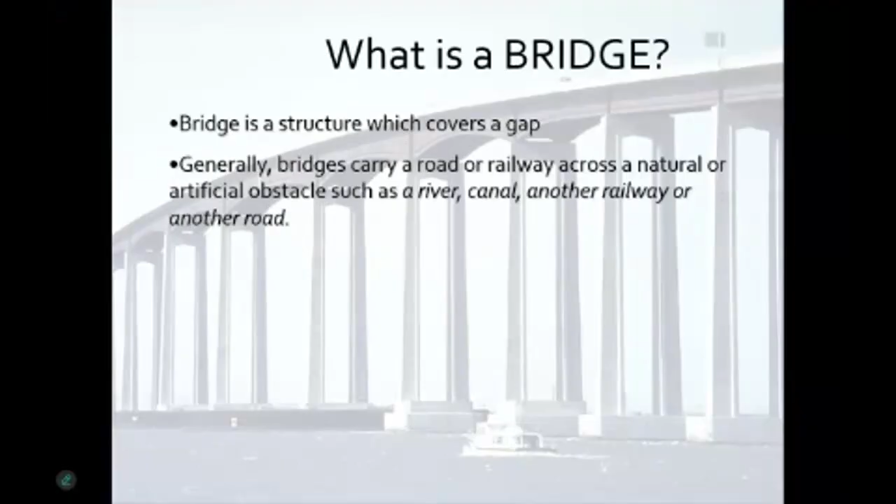So what is a bridge? Well, very simply, a bridge is a structure that covers a gap. Generally, bridges carry a road or a railway across a natural or an artificial obstacle like a river, a canal, another railway, or another road.

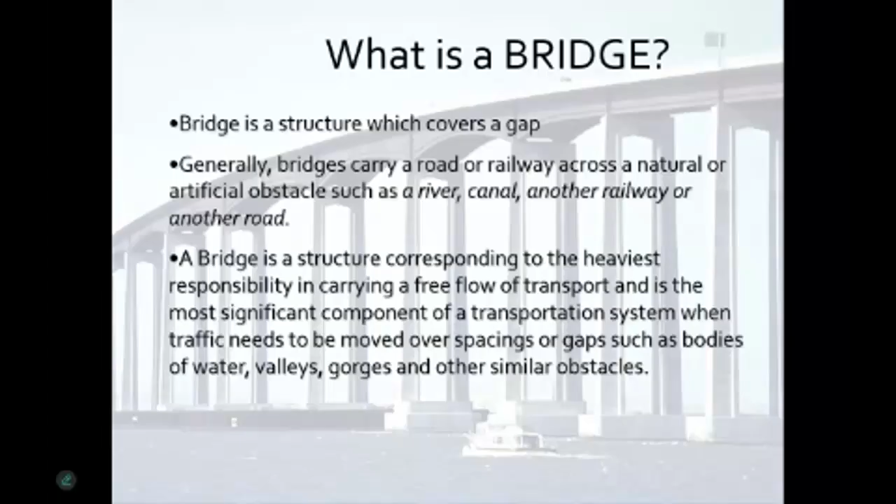The bridge is a structure corresponding to the heaviest responsibility in carrying a free flow of traffic, and is generally the most significant component of a transportation system when traffic needs to be moved over spacings or gaps, such as bodies of water, valleys, gorges, or other similar obstacles. A bridge is often the key element in a transportation system, as it controls the capacity of the system.

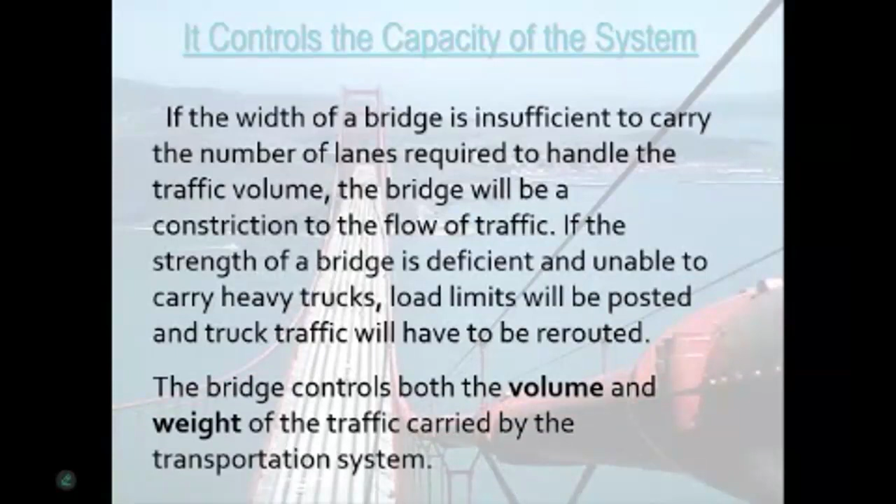If the width of a bridge is insufficient to carry the number of lanes required to handle the traffic volume, the bridge will become a constriction to the flow of traffic. If the strength of a bridge is deficient and unable to carry heavy truckloads, load limits will be posted and truck traffic will have to be rerouted. So the bridge controls both the volume and the weight of the traffic carried by the transportation system.

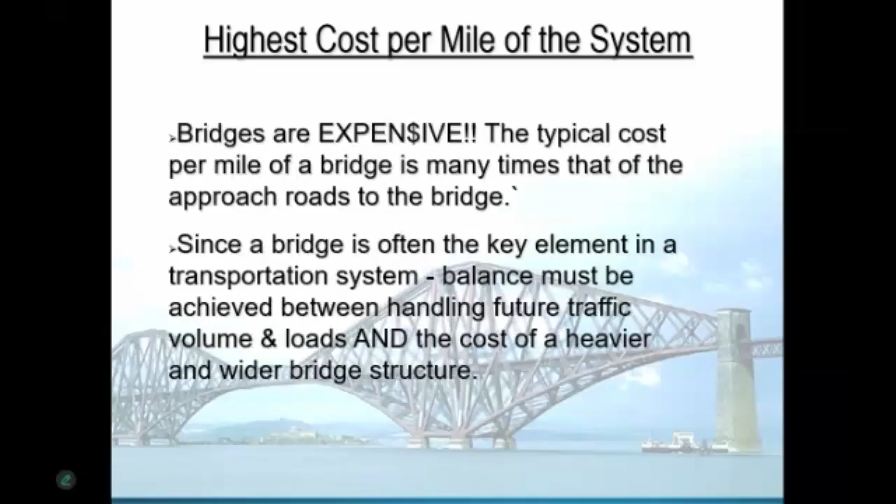Generally, it's the highest cost per mile of the transportation system. Bridges, very simply, are expensive. The typical cost per mile of a bridge is many times that of the approach roads to the bridge. And since a bridge is often the key element in a transportation system, balance has to be achieved between handling future traffic volume and loads and the cost of constructing a heavier or a wider bridge structure. If a bridge fails, the system fails.

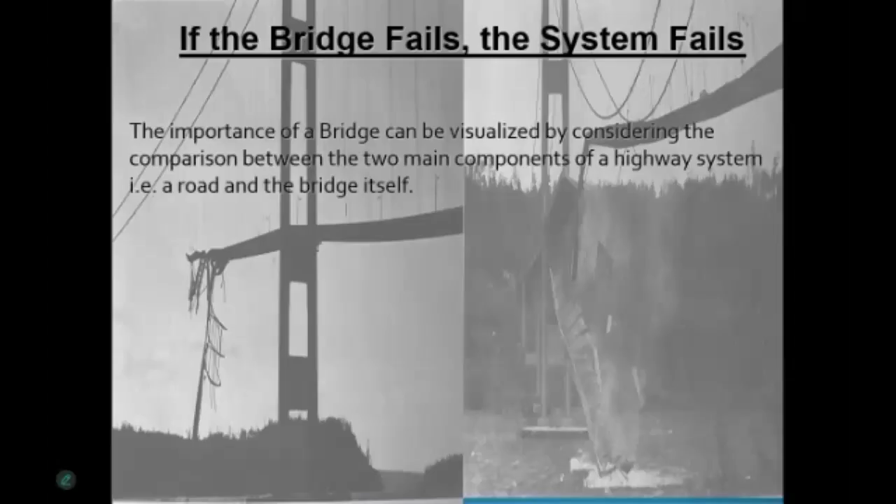The importance of a bridge can be visualized by considering the comparison between two main components of a highway system, i.e. a road and the bridge itself. For example, suppose in a road there occurs deterioration, ultimately a crack in the road, thus making a sort of an inconvenience for travelers on that roadway.

But it won't result in stopping the flow of traffic, as traffic can proceed or a bypass can be provided. Now, the traffic will no doubt continue to pass at a slower speed with some problems in the roadway, but in the case of a bridge failure, its flow is completely stopped. And that is the reason it's often said that if a bridge fails, the system fails, as the function of the structure could no longer be served at all.

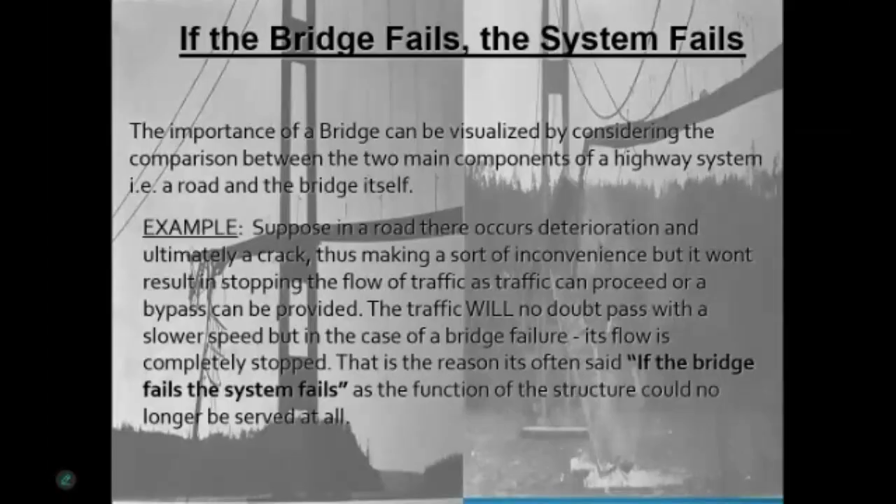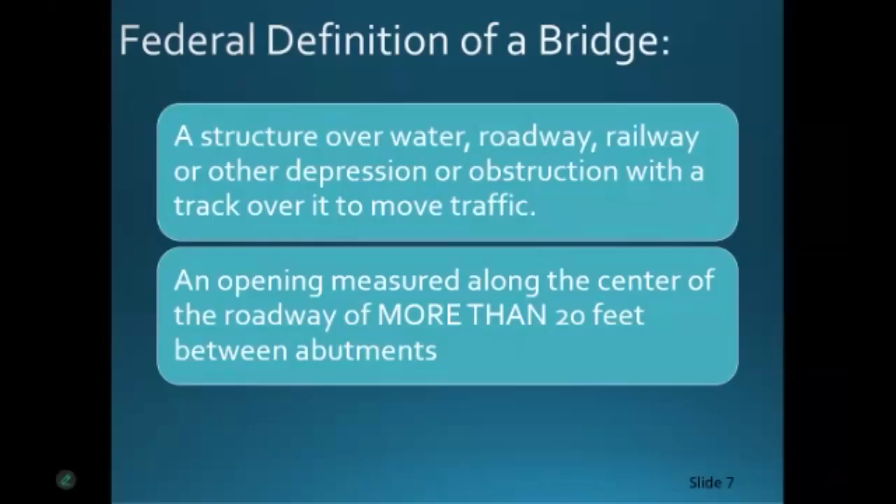Now, Federal Highway's definition of a bridge: a structure over water, roadway, railway, or other depression or obstruction with a track over it to move traffic. It's an opening measured along the center of the roadway of more than 20 feet between abutments. So, there are a variety of different types of situations this might occur. 20 feet is not very long, so it doesn't take much of a stretch to qualify as a bridge.

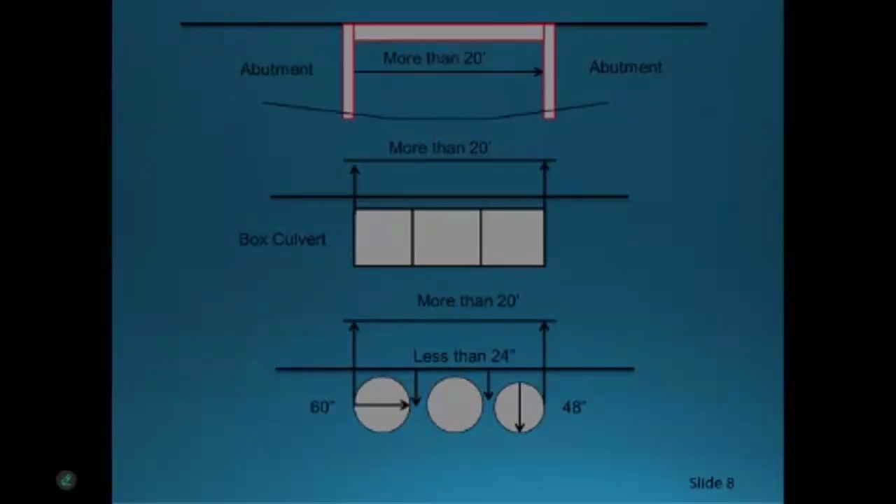Type of bridge materials, just about anything you imagine: timber, reinforced and prestressed concrete, steel, masonry.

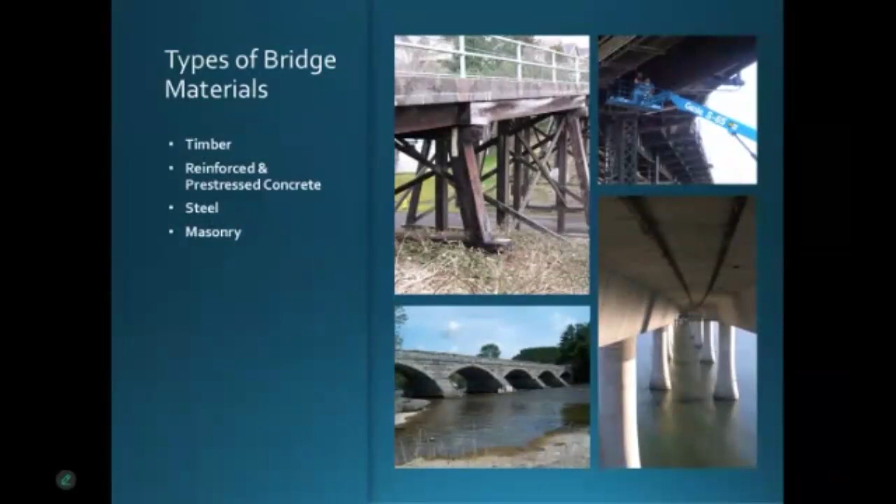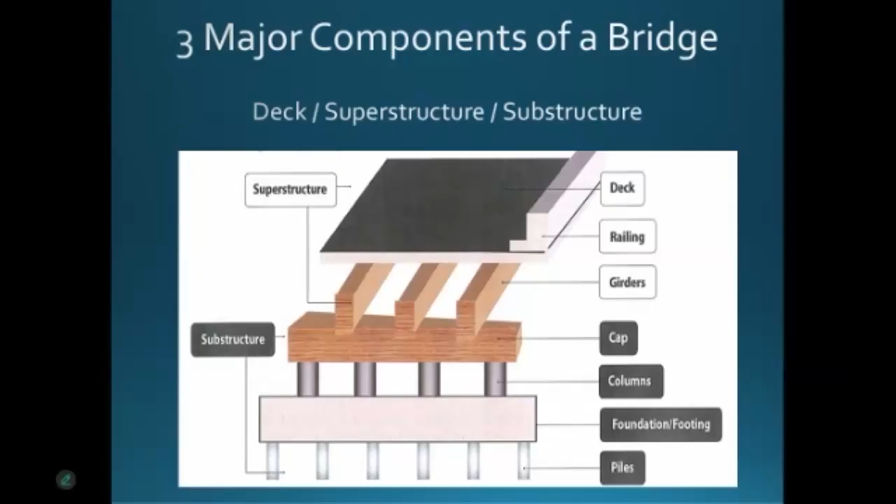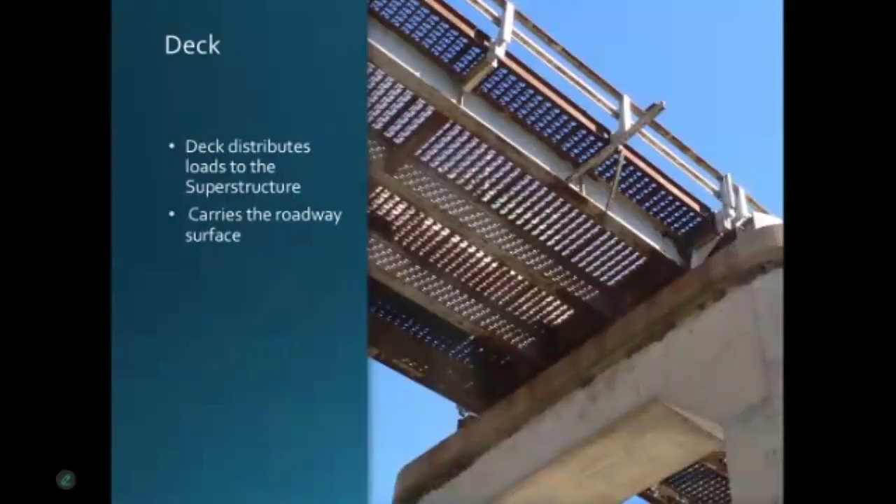Now, there are basically three major components of a bridge: the deck, the superstructure, and the substructure. The deck, of course, distributes the loads to the superstructure. It's the part that carries the roadway surface, obviously. The superstructure are all the parts of a bridge that are mounted on top of the supporting substructure system.

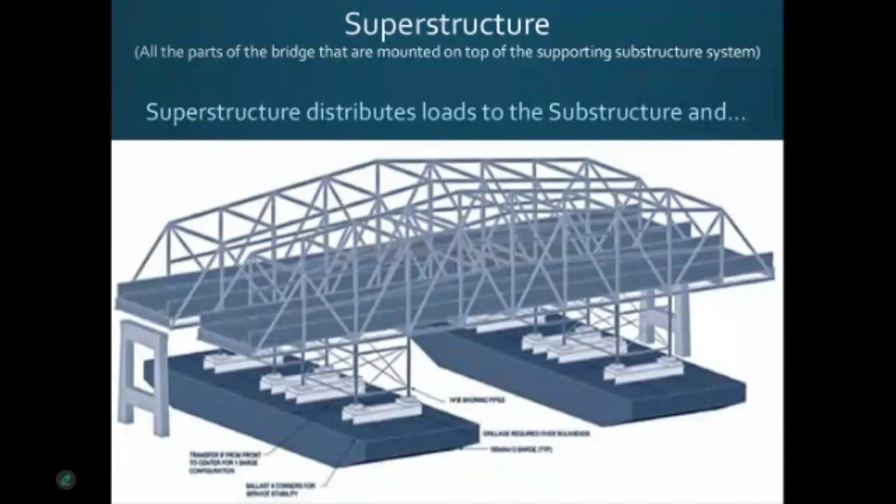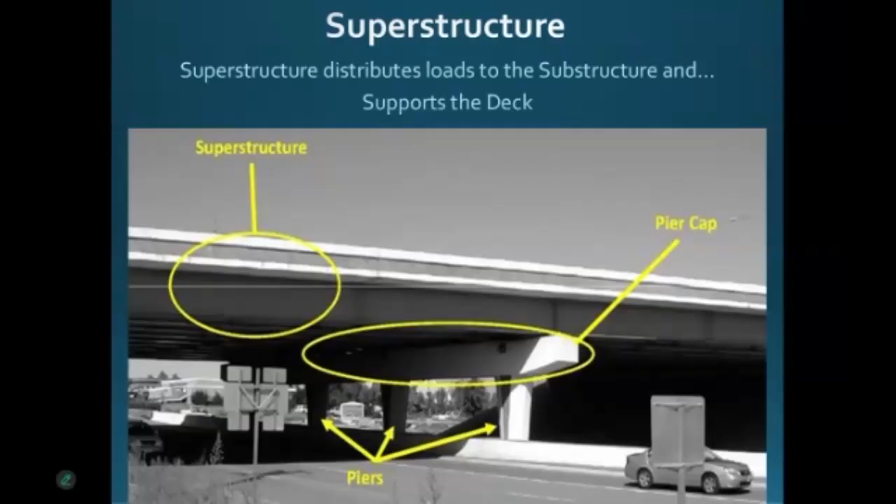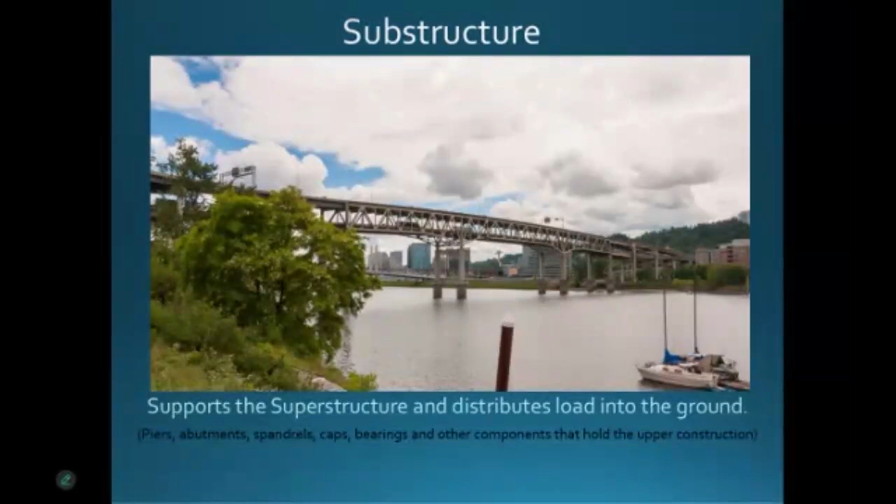And then we've got things like the pier caps, the piers themselves. It's kind of an example of the superstructure. And the substructure is what supports the superstructure and distributes loads to the ground. So your piers, abutments, spandrels, caps, bearings, and all the other components that hold the upper construction. All three components work together.

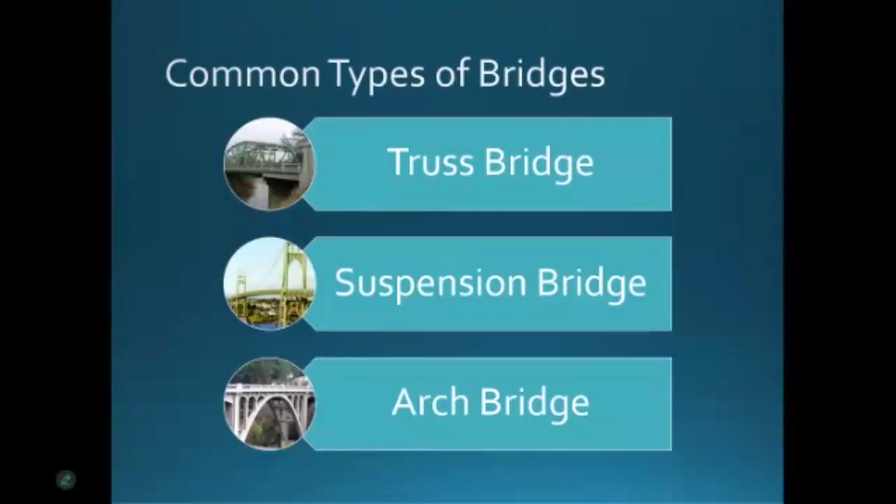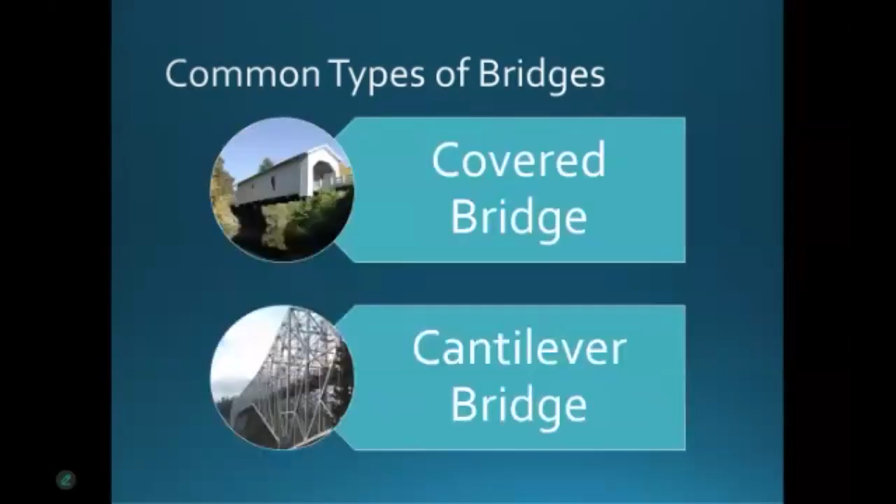Now, some of the common types of bridges: we have truss bridges, suspension bridges, arch bridges, slab bridges or simple beam bridges, cable stay bridges, movable drawbridges, covered bridges, cantilever bridges. And with all bridges, there's two primary forces that are always applying pressure: tension and compression.

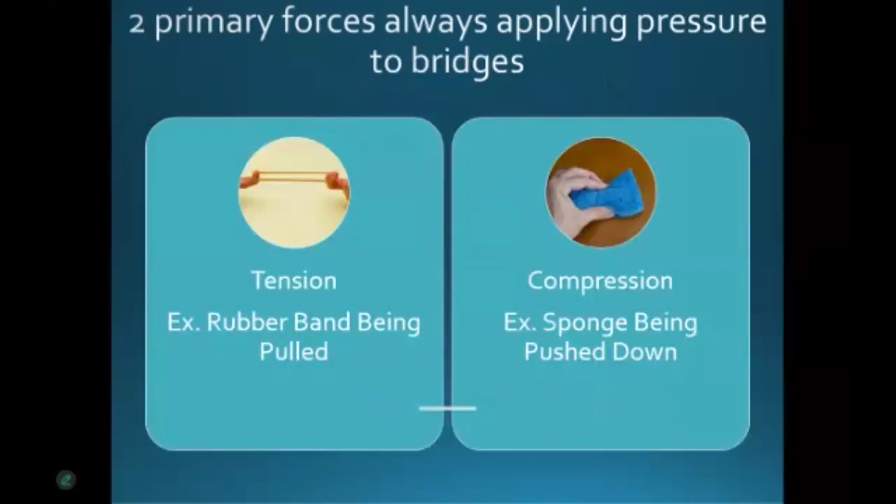And these and other factors are why we're going to be talking very soon about load ratings.

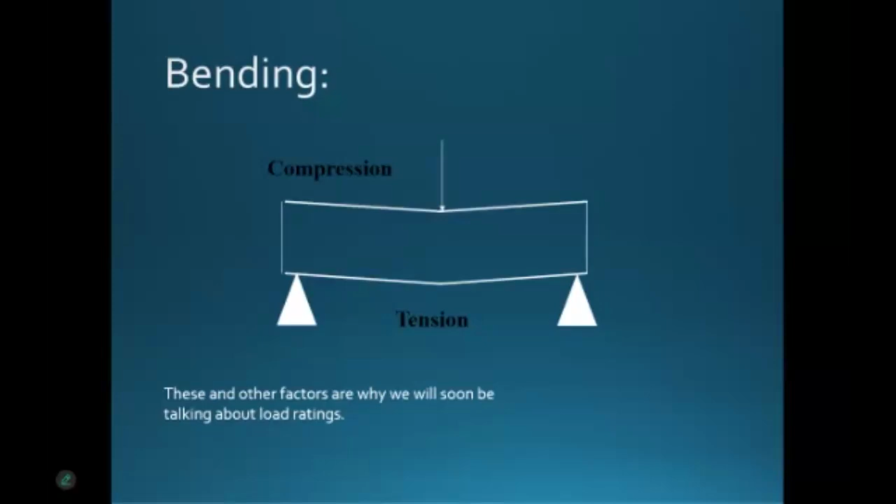Compression and tension are significant forces on any bridge. And if we haven't calculated properly the type of compression and tension that are involved, we could have serious ramifications down the road.

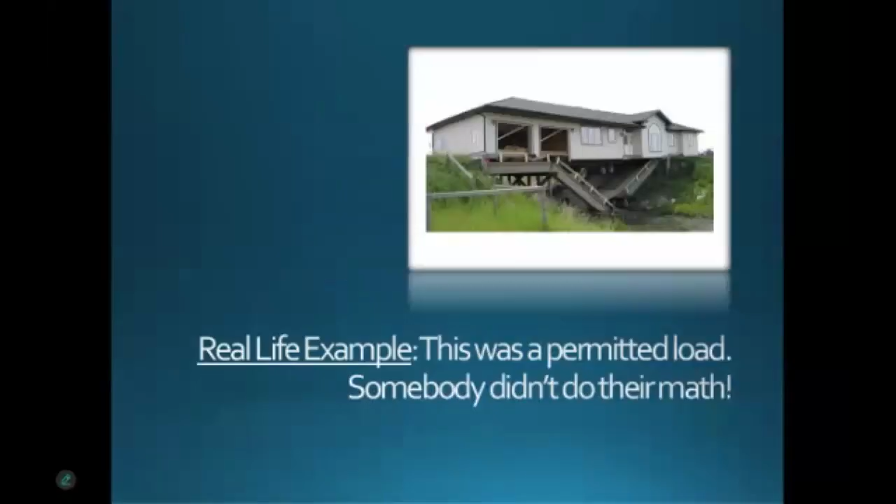Now, the significance of what we do when a bridge—when we as bridge inspectors, engineers, or superintendents—don't get the math right or make an error in judgment...

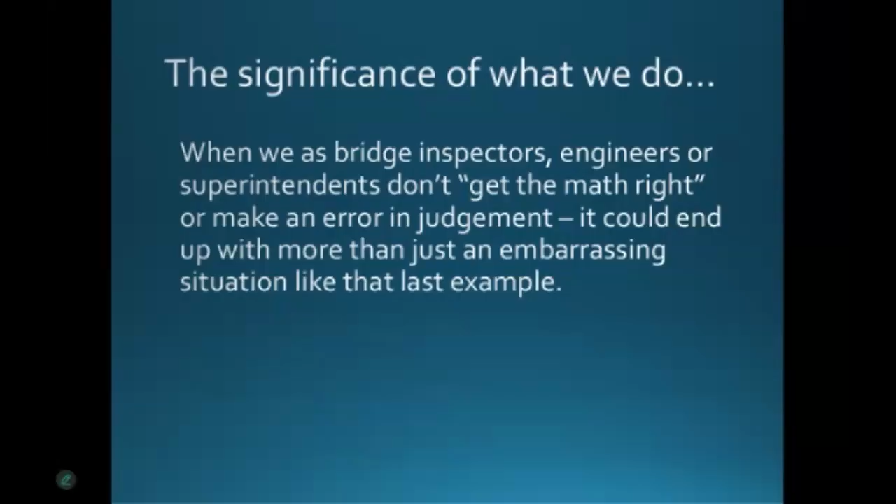...it could end up with more than just an embarrassing situation like that last example.

Case in point: back in 2018, there was a bridge collapse in Florida. This particular bridge was on the campus of Florida International University down in Miami.

This particular situation has some personal significance to me, because in 2018, my daughter was in the process of trying to decide what college she was going to go to.

So we were traveling around the state visiting various university campuses. The day before this bridge collapse happened, we were 50 miles to the north in Boca Raton and had visited Florida Atlantic University.

And this day, in 2018, when the collapse happened, we were supposed to be on this campus taking a tour of Florida International University.

But that morning, my daughter had said, 'You know what, Dad? I don't think we need to go to FIU. I think Florida Atlantic is where I want to go.'

So we canceled our campus tour—a tour that may have taken us on this very pedestrian bridge across from the campus of FIU, across 8th Street and into town.

I remember that morning driving out of Miami and hearing on the radio, right about the time we would have been on campus, possibly walking over this bridge, about the collapse.

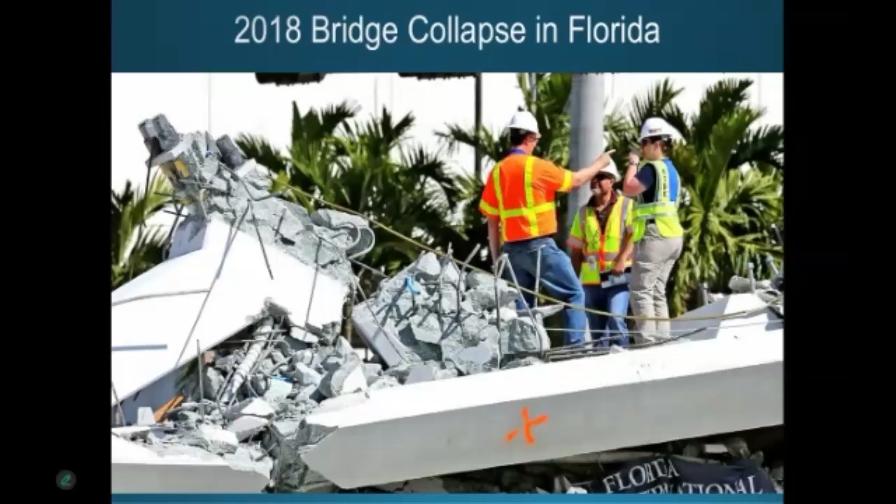I'll tell you a little bit about what happened, how it happened, and what the results were.

First off, you might find it interesting to note that there were some cracks that had developed in this bridge, and it was still in the process of being completed. It had just recently been moved into place.

The construction took place in one area, and then we had mobile units that were kind of putting it in place, and they were doing some final touches.

But here's a voicemail message that was left by an FDOT engineer who had done an inspection a couple days prior to this disaster happening.

And here's the message the engineer left on a voicemail.

Well, we've taken a look at it, and obviously some repairs or whatever will have to be done. But from a safety perspective, we don't see that there's any issue there, so we're not concerned about it.

From that perspective, although obviously the cracking is not good, and something's going to have to be done to repair that.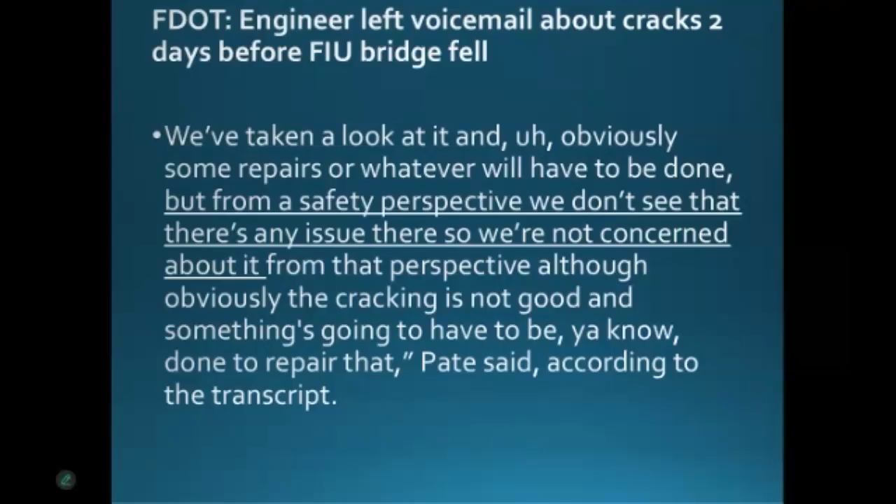So that was the voicemail message left by the engineer who had just done an inspection on the bridge. He didn't seem to think it was too big of a deal. Well, two days later, of course, it collapsed.

Now, a little bit about this bridge: according to a fact sheet on FIU's website, it cost $14.2 million to build and was funded as part of a $19.4 million grant from the U.S. Department of Transportation.

And it was designed to withstand the strength of a Category 5 hurricane.

Of course, being in Florida, especially South Florida, that's a big deal. The fact sheet also said it was supposed to last for more than 100 years. Well, obviously that didn't happen.

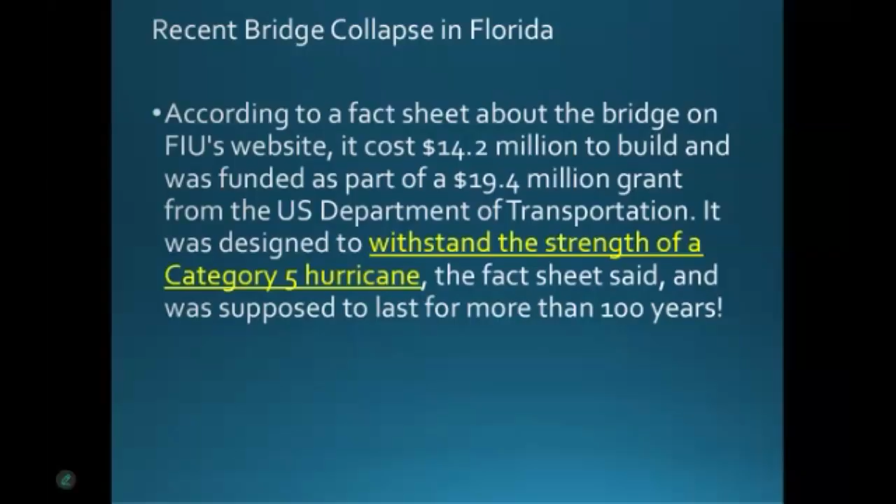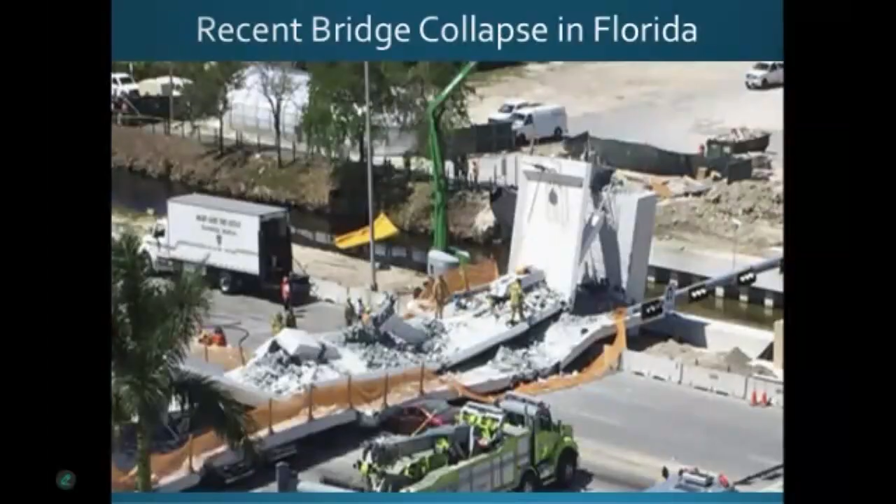So here's a picture of the collapse. And what you don't see, unfortunately, in this picture, can't appreciate, is that 4 people died and many others were injured.

The bridge collapsed and trapped numerous people who were in cars passing underneath it at the time. 4 people died, several others were seriously injured.

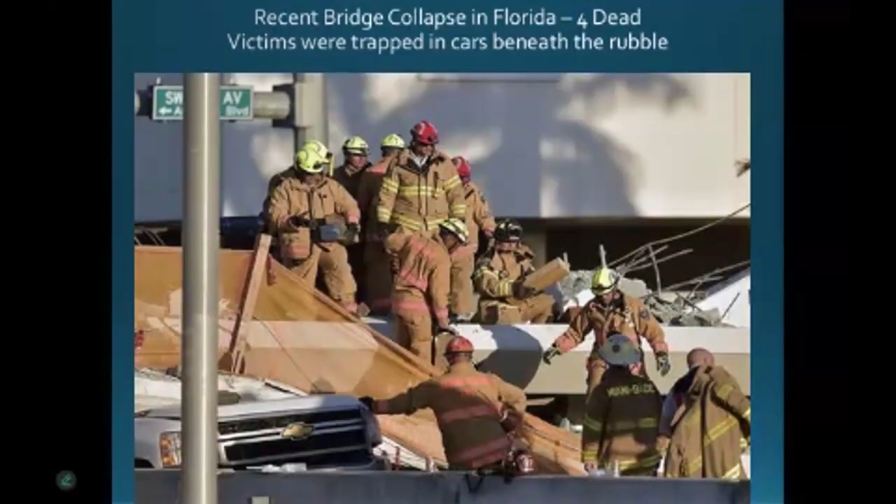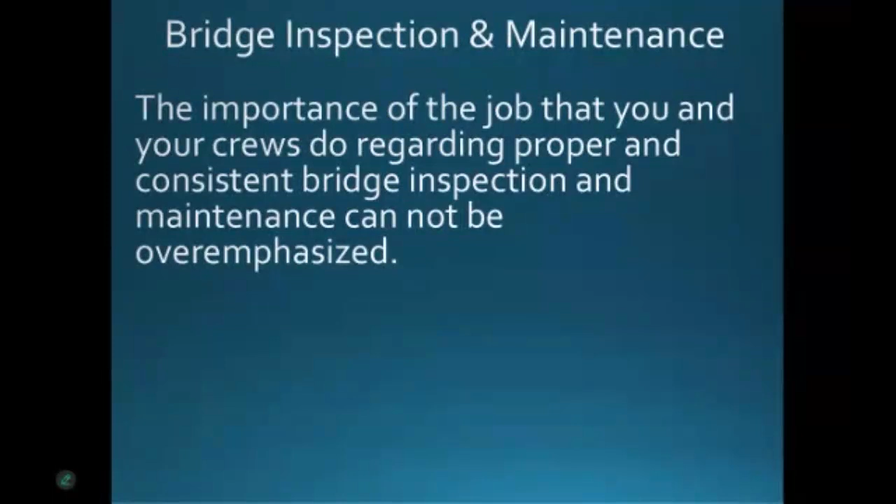Bridge inspection and maintenance: the importance of the job that you and your crews do regarding proper and consistent bridge inspection and maintenance cannot be overemphasized. It could literally be a matter of life or death.